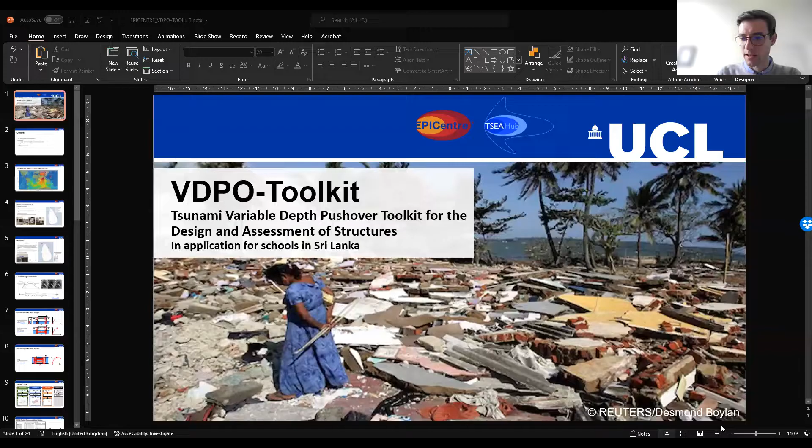Yes, okay, perfect, great. So I'll be, as Arash mentioned, talking about a Tsunami Variable Depth Pushover Toolkit, which was developed as part of my PhD research and is in application for schools in Sri Lanka, and also will be for the school network in the Maldives.

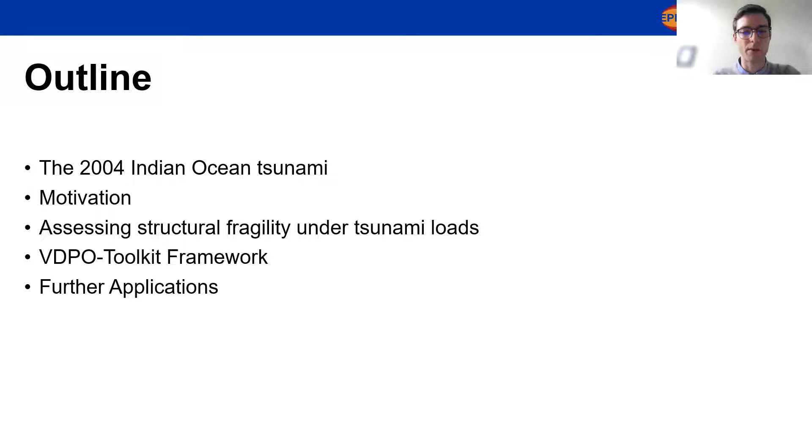So I'll be talking about what variable depth pushover is, but the starting point of the talk and of a lot of the methods, at least at EPICentre, developed to understand and assess structures in response to tsunami loading starts with the 2004 Indian tsunami. I'll then be talking about the motivation behind the toolkit and why I've developed it. Then I'll give an overview of how structural fragility is assessed under tsunami loads, continued by the Toolkit Framework. And if there's time at the end, I'll go over some of the further applications of the toolkit.

So the December 26th, or the Boxing Day tsunami in 2004, occurred when an earthquake in just southern Sumatra, along the northern Sumatra Andaman subduction zone, an earthquake of moment magnitude 9.1 to 9.3 erupted, and the rupture was 1,200 kilometers in length. So to give you a sense of scale, the UK, when I measured it, was in height 900 kilometers. So the rupture is even greater than the entire height of the United Kingdom.

And essentially the Burma plate slipped above the Indian tectonic plate at an average height of about 10 and 15 meters in certain regions. And that produced a wave which propagated across the Indian Ocean, as you can see here, and resulted in catastrophic losses.

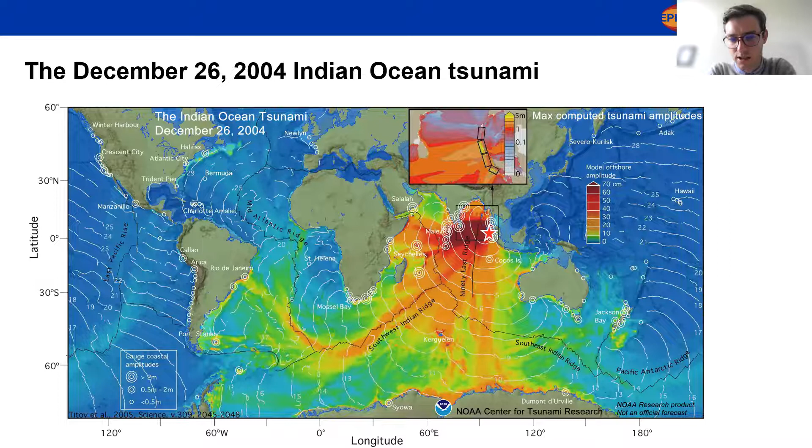So the tsunami caused 226,000 casualties across 13 countries. And in Sri Lanka, it had very high impact on the school network. So it damaged and destroyed 182 schools across the coast. So the impact was heaviest in the eastern district here in the Ampara and the Batticaloa regions, as well as in the southern region here in the Galle district.

So in total, the number of schools that were affected was 5% of the entire school building stock. So schools played a critical role in the recovery of communities. One, they served to accommodate students that had lost their school through student transfers, but also many schools acted as emergency shelters for hundreds of thousands of people that were made homeless in Sri Lanka.

To just give you a sense of the recovery, it took around 2 years for most schools to be reconstructed and rehabilitated. However, to show the resilience of a school network doesn't only depend on the physical assets of the school network, but it also depends largely on the functionality of surrounding schools. And so students in the most heavily affected regions were able to return within 2 weeks, between 2 weeks and 2 months after being struck by the tsunami.

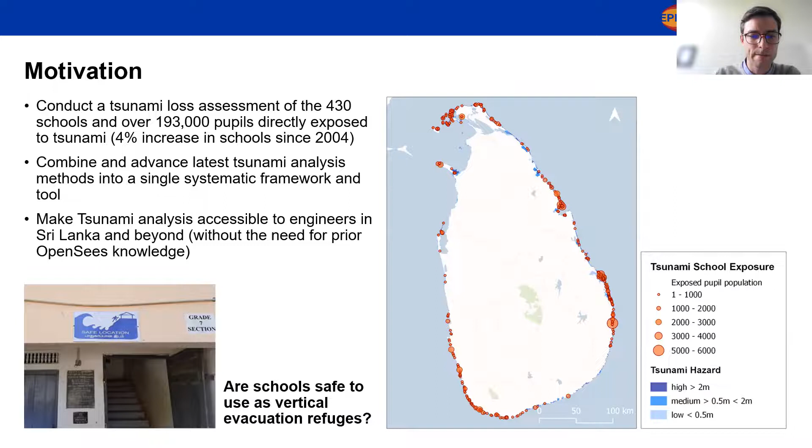Before we get started, I'd like to familiarize you with some of the characteristics of tsunami forces and their interaction with structures.

The tsunami wave, or the tsunami period of the 2004 tsunami, was approximately 40 minutes long, so it has a very long period. In relation to structural periods, which range between 1 or 2 seconds, we can use a static approach of analysis because the difference in structural period versus the tsunami period is so large.

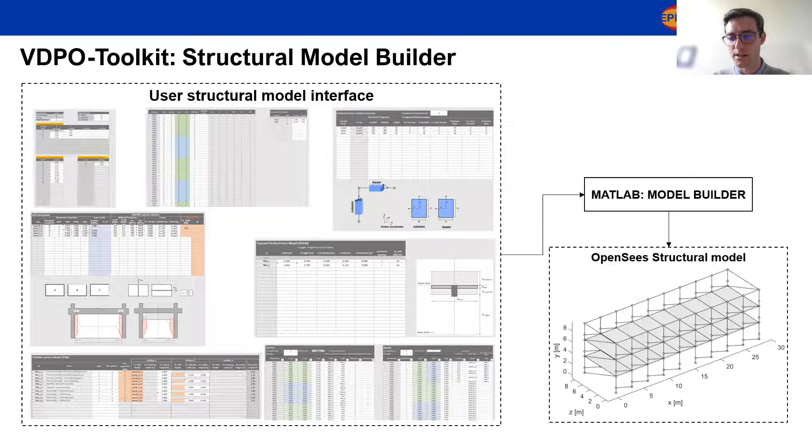Okay, and then there's the Tsunami force model. This component calculates all the forces which are input into the structure for analysis. It's an Excel user interface where the user can define the characteristics of a tsunami based on hazard data as well as site conditions.

To illustrate what's going on in the background, we are going to inundate a 3-story school, one in Sri Lanka, a typology commonly found across Sri Lanka. It has 2 rows of columns, a central staircase as you can see here, and 2 classrooms on each side.

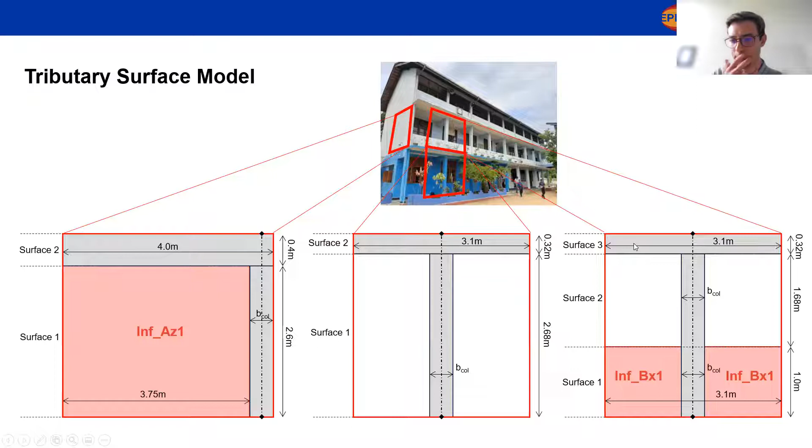Here's an example. This central one shows the ground floor column, so we'll expect a constant width along the height of the column. Once the inundation reaches the beam, the tributary width will increase to, in this case, 3.1 meters. On the first floor, you have the parapet, made out of masonry infill on either side of the column, then an opening, and at the top, the beam.

So there's one important point to raise here, and that's the difference between hydrodynamic and hydrostatic forces. The toolkit allows you to make the assumption of whether the structure is impermeable or permeable.

Because this school has a staircase in the middle, we can assume that the water inside the structure would rise along with the flow on the exterior of the building. These two static components of the force will essentially cancel out because there are static hydrostatic forces acting on both sides of the columns, and thus they cancel out.

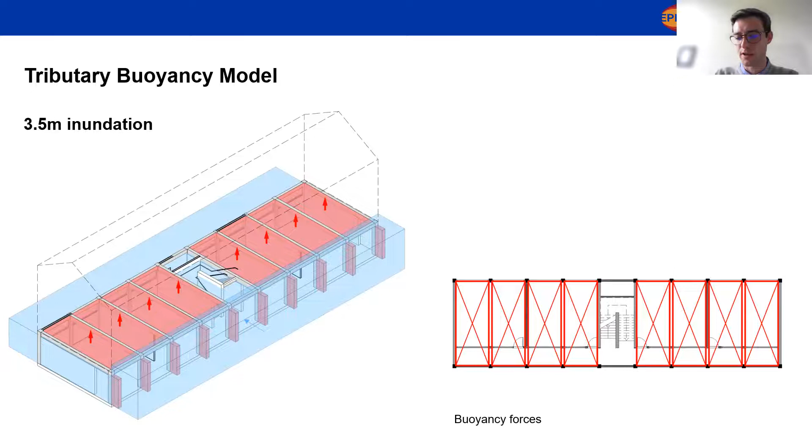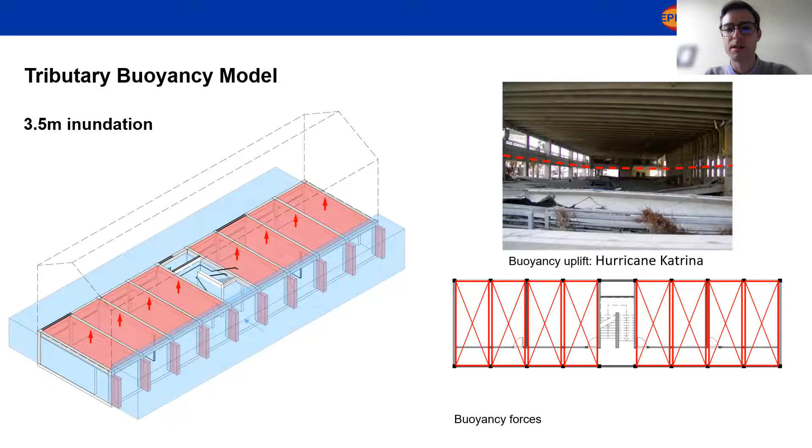Where the red dotted line is shown is where the floor slab used to be. Essentially, it was pre-tensioned beams which were uplifted because they had huge coffers of air underneath them due to these very deep beams. The floor slab was lifted up, and then once the water receded, it dropped back down to the level you see in this photo.

So let's raise the inundation now up to 6 meters, to show the behavior of the infills and how that affects the forces exerted on the structure. In plane, as with the seismic case, the in-plane masonry infills will start to form compressive struts, represented by the red diagonal line here.

And out of plane, we can assume at some point the out of plane capacity of the infills will be exceeded and the infill will fail. So then you have a reduction in the drag forces because the surface area decreases all of a sudden.

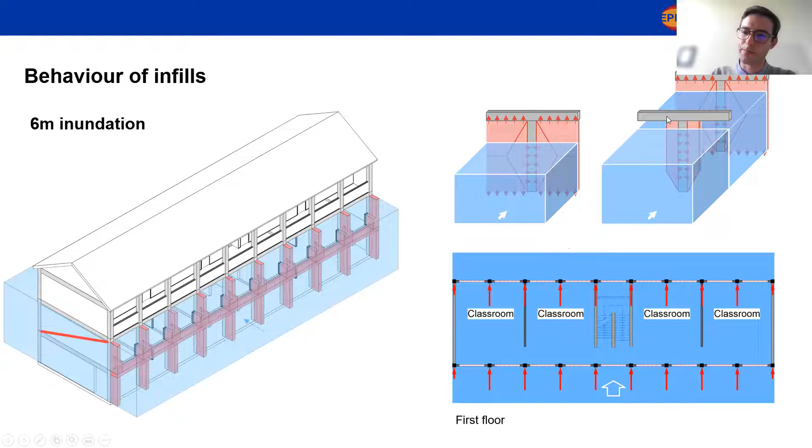Also, as I was showing, the parapet was protecting the rear face of the structure from drag forces. Once that fails, we can assume the tsunami flow extends to the back face of the structure and exerts forces as shown on the top right diagram. And that raises a question of high uncertainty.

In the aftermath of the 2004 tsunami, many of the schools demonstrated blowout infills, but there were also components that remained stuck on, and essentially there's no empirical tests to give us any guidance on how great a percentage of the infill will remain stuck on.

So the approach that the toolkit takes is, again, using yield line theory. We're assuming that the bottom trapezoid will completely wash away, and then a portion of the infill will remain stuck on. That can be treated by a random factor. This is a representation of it on the right hand side.

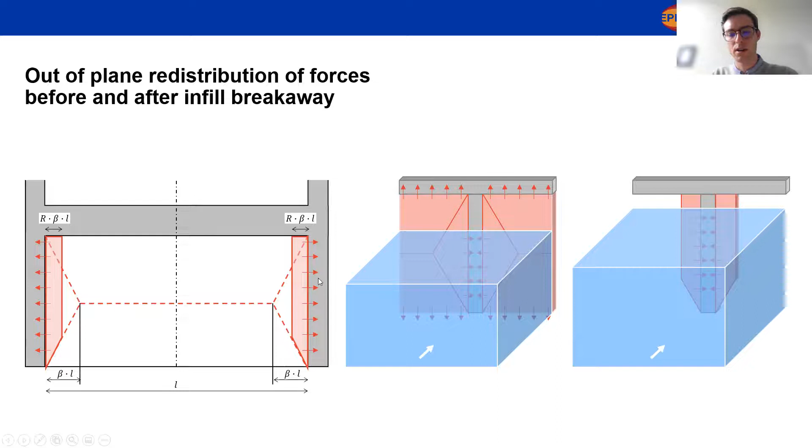Those forces will continue to attract on that surface area and redistribute them directly to the column. So these are essentially the time series for the columns here on the left, and then the beams, the vertical loads of the beams on the right hand side.

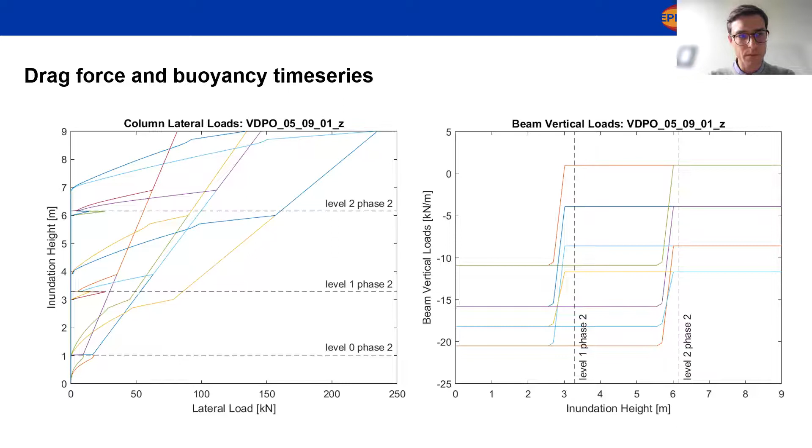As you see, for the lateral columns, at some stages there are sharp reductions, shown by these horizontal lines, and that's when infills fail. Once the inundation reaches 3 meters, which is the first floor level, there's a dramatic reduction in the distributed loads on the beams. The effect of that on the columns is a reduction in the actual axial forces and consequently a reduction in the shear capacity of the columns as well.

And so let's hope this works. This is an image showing the lateral drag forces acting on the column. You can see initially there are step decreases in the drag forces, and that occurs when the infills fail.

And then on the right hand side is the net reaction with respect to tsunami inundation of the columns. Sorry, of the base nodes.

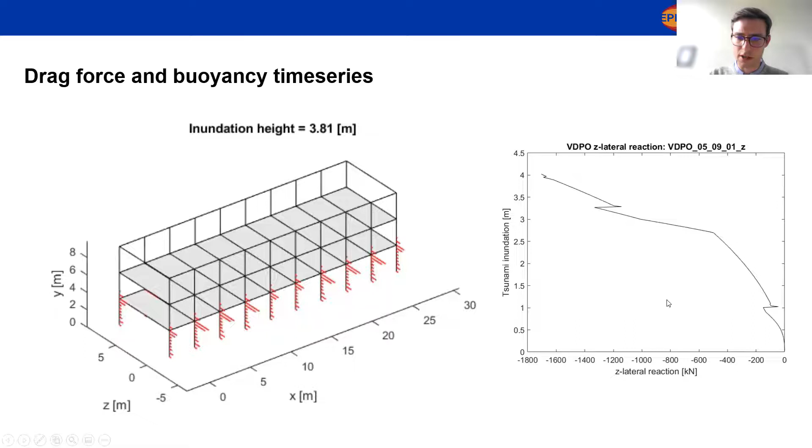So, further applications. There's a module that allows you to assess structures and compute the loads using the ASCE 7-16 formulations, and you can conduct systemic as well as component level checks. There's a link to the paper that discusses that in further detail.

The toolkit is also modular, so you can build your 3D structure, and one of the aspirations is to build plugins in order to be able to conduct seismic analysis. We'll also expand it to be able to model steel frames.

And lastly, what I'm currently developing is a fragility function generator. That is it from me. Thank you for your attention, and I'd be happy to take any questions.

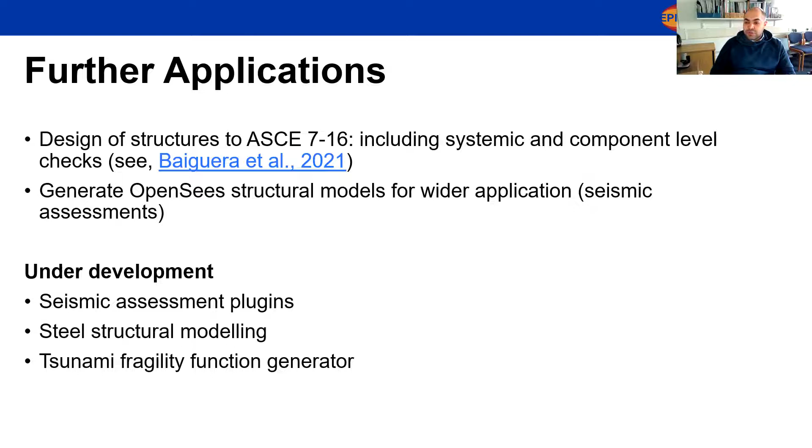Okay, fair enough. Makfira, I just saw that you raised your hand. Yes, thank you Arash, thank you Jonas for your presentation. I'm wondering, you define the forces as hydrostatic or with angular distribution of forces.

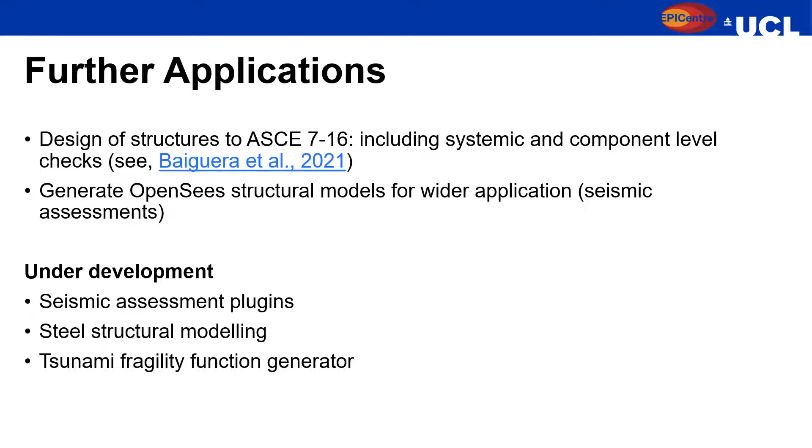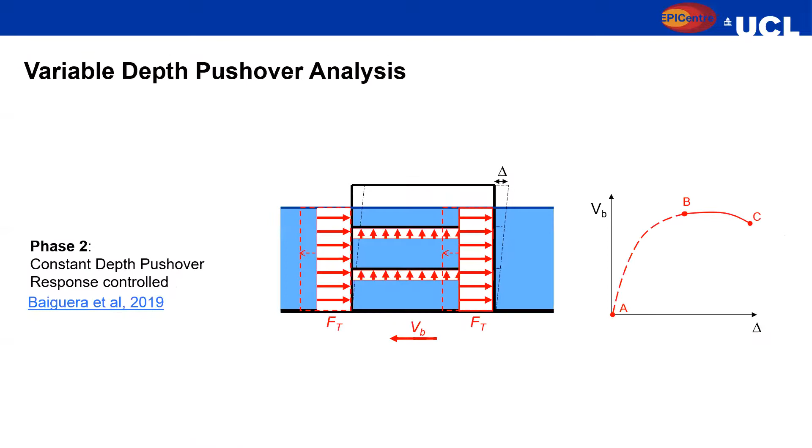But is there any correlation, or how significant is the density of the water, which sometimes brings sediment or part of a collapsed building? So does it take into account the mechanism of hydrostatic forces applied to the building?

Thank you, Makfira, if I said your name correctly. So the fluid density is considered here—I think it varies for sea conditions. You would put in the fluid density of seawater, and that does affect the forces exerted on the structure. I'm not sure if that answers your question or not.

Okay, but maybe—how do you define it, since the fluid density is maybe not uniform? There are many materials being brought by the water. How would you measure the density itself, since it's not uniform?

So debris would be handled separately—the ASCE has formulations to estimate debris impacts. Often there would be palm trees, or a boat or something that gets dammed against the structure, increasing the surface area against which the water flow acts, which then gets redistributed to the columns. The way we'd model that in this framework is to define a greater tributary width to those columns—say the damming covers 70% of the bay area—we'd create, similar to an infill, a surface area against which the loads are calculated.

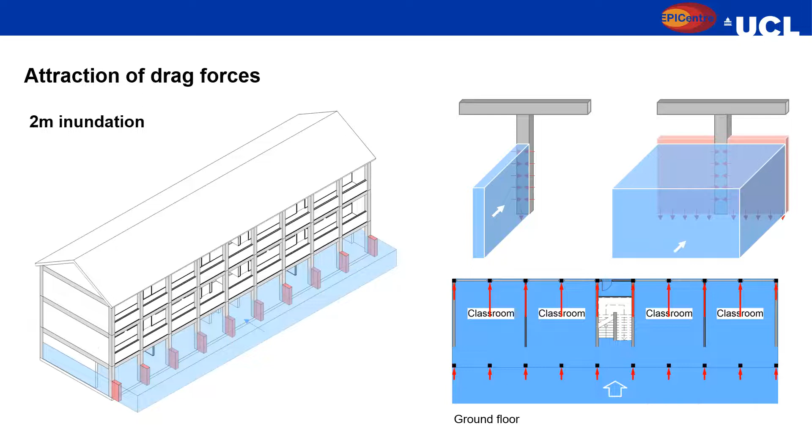Very interesting. What I was wondering is, you mentioned that the tsunami wave has a very long period, and you're analyzing it in a static load scenario. So I was wondering if you thought this would also be applicable to flash floods or conventional flooding. You mentioned the example of Hurricane Katrina, but maybe you would have to tweak it or not. Just wondering what your thoughts are there.

I think we could, I mean, for flash floods or coastal kind of waves, you would get an initial bore force, which is what it's called, an initial impact. When the wave first impacts the structure, you get an impulsive force, as shown here. In tsunami, because the rise in inundation is so gradual, that bore force isn't really shown to be dominant, so it's not something we consider directly in the formulations. It's much more the drag forces.

But yes, absolutely, we could modify it. Essentially, we would replace this tsunami model, which calculates the loads, replace the equations to include those bore forces, where you then define the flash flood parameters, and then it would work with everything else.

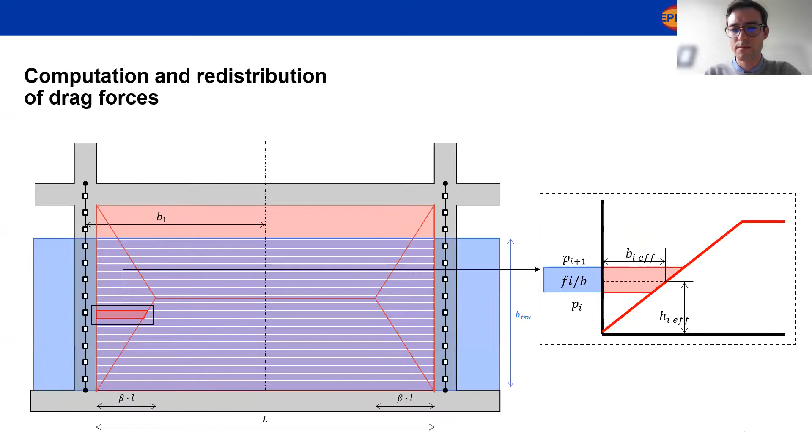Okay, another question is, usually in flooding we consider the loading as triangular. Flash flooding, okay, can be reversed as well. Are you guys considering the whole thing rectangular, or is it variable? Because in some images I can see variation, and in some images it's represented with a rectangle.

It depends on whether your structure is impermeable or not. These schools, because you have the staircases, the water would kind of come up through the staircase, and then you'd have a stagnant pool occurring on that floor level, roughly in height with the water outside. So those hydrostatic element components would cancel out, and so then we just assume a rectangular distribution for the drag forces.

But okay, the toolkit does allow you to phase it so that you can assume that it's impermeable. I think many of the studies that were conducted before assumed impermeable structures, and therefore, if you go back to those papers, you'll see triangular loads.

Okay, one other thing, again following this concept, makes sense. Yes, this and that, they cancel each other, so you're just left with the dynamic load. Generally, like in wind, for example, we have the push and pull, the push and suck on one side. When the inundation of tsunami ends and the water goes back, do you guys worry about that, or have you considered it, or should we not worry about it?

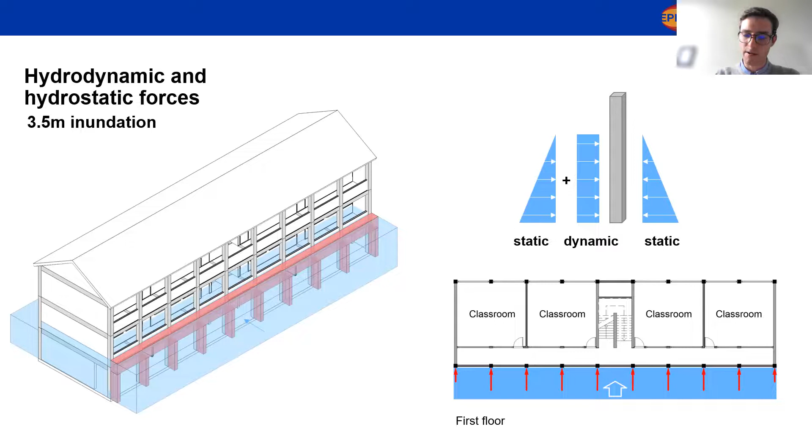That is also an aspiration we will look into next. But the main factor there is scouring, and I believe I showed you a photo here. The schools in Sri Lanka built along the coast mostly sit on sandy soils, and as the inundation from the tsunami flows past the structure, it scours, or digs out a hole around the edges of the structure.

If that process continues long enough, you see it very clearly here, it completely undermines the vertical support of the structure, undermines its foundation. So what we've seen a lot is that the structure essentially collapses into the scouring hole.

Okay, so that's an additional issue you have. Yes, and regarding the previous point, the inundation causes the same issue. The problem is when the tsunami hits, it causes some damage, then progressive damage means your structure isn't the same when the water comes back - it's weaker. So definitely the damage will be higher as well. Good luck calculating that too.

Anyone else have any other question? No questions. Okay, I'm just looking at my notes to see if I have any other question. Yes.

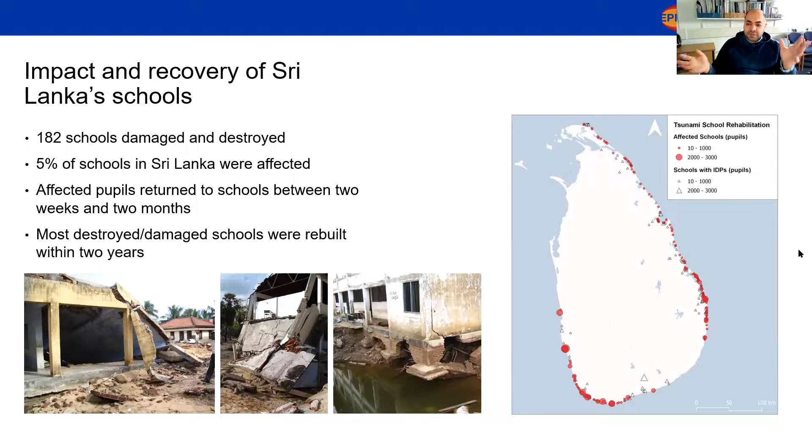Recently, Seismostruct, the 2022 version, introduced Tsunami loading based on ASCE 7-2016, as well as the Foster method. Just briefly, is there any major difference? What are the major differences between ASCE and Foster? Okay, so just for general knowledge.

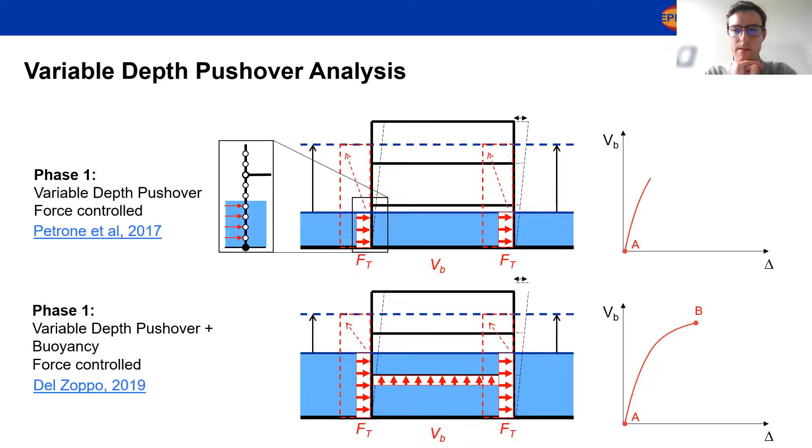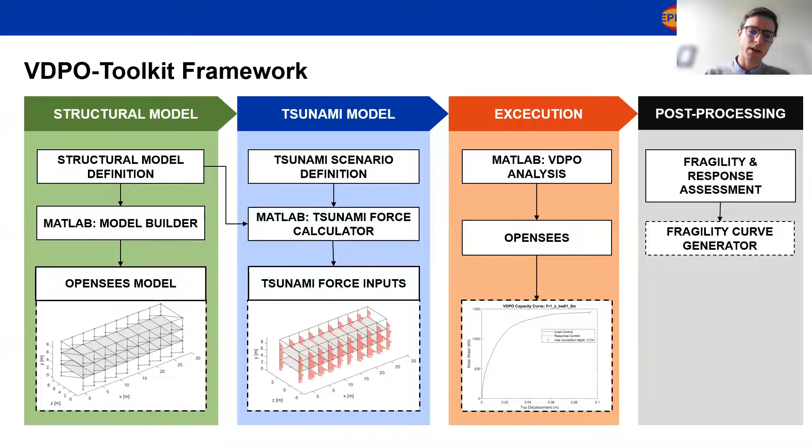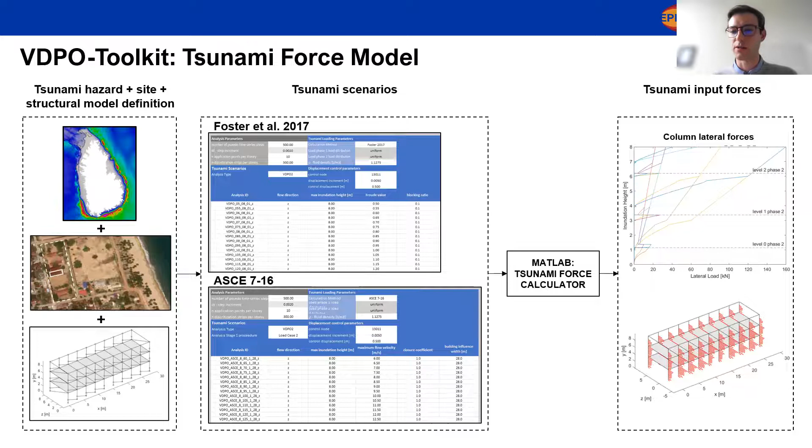I've not actually used the Seismostruct version, but there you can only apply loads as point loads at each story level, at the ends of columns. Past studies have shown that because loads are applied along the height of the column, you get a buildup of shear forces, so you wouldn't get that same type of behavior in Seismostruct. I think Seismostruct would be able to model, let's say, a bare frame structure, but it wouldn't be able to model the variable surface areas and properties of infills.

That is one of the major improvements in the method - the variable nature of the structural response in terms of tributary surface area. I also believe it doesn't have buoyancy forces, which are very significant. In this case, they reduce the axial loads on the columns by about a third for each level that the inundation rises up to.

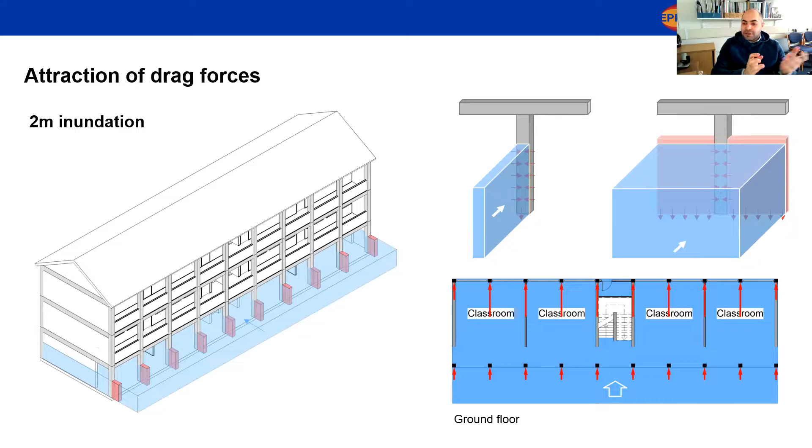The question was mainly what is the difference between ASCE and Foster, but you explained the difference between your method and Seismostruct. Thank you very much. But in a few sentences before we finish the session, any major difference between the ASCE and Foster's methods? It's mostly in the way the...

Short answer: two different equations for estimating the drag forces. They're not extremely different spectrums, but Foster's way uses the Froude number, whereas the ASCE way has you input the flow velocity. In Foster's method, we assume a constant Froude number, whereas in the other method it's variable. So it's different input parameters, in short.